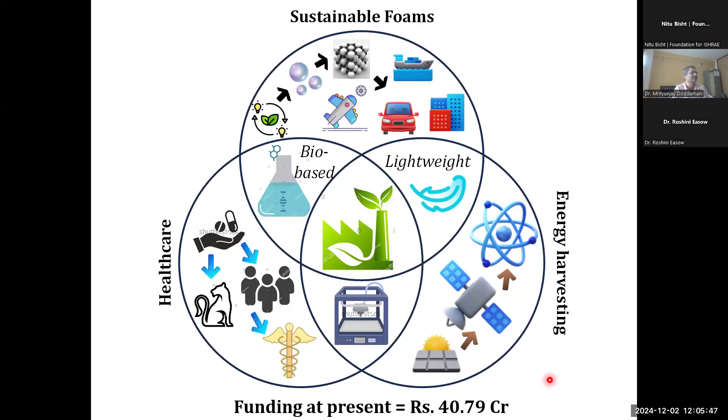And here pertaining to foams, this is where I got connected to ISHRAE, though I am not from thermal sciences. Presently my group is being funded for 40.79 crore from various funding agencies. So just before going into the ISHRAE project of foams, I want to just talk about foams a little bit. This is the area wherein I've been working for the last 10 years, and my PhD was also in the same area.

So we call it foams. Foams are basically two types: one is a closed cell foam, second is an open cell foam. This is a typical picture of a closed cell foam, wherein in any material we infuse hollow microballoons. And by infusing these hollow microballoons, we take advantage of that to the tune of even going for insulating foams. So here the benefit is we can have different size microballoons, different wall thickness, because these are hollow, thereby the wall thickness comes into picture.

So based on the different size, based on the different wall thickness, the property of a given foam, or a composite for that matter, changes. So we have an additional axis, and that is the wall thickness, and that's what has been shown here. We can have the same microballoon outside diameter, but inside diameter keeps on changing. And these different inside diameters give us the flexibility of developing or designing a material.

From underwater vehicles to marine, automobile, aerospace and space applications, this flexibility is given by micro balloons having the same outside diameter but varying inner diameters. But what would be the material of these micro balloons?

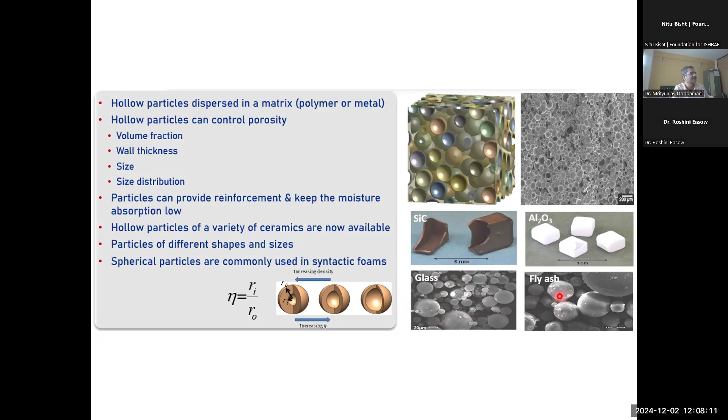But from the strength and property enhancement perspective, we always go for spherical ones, because there is no stress concentrator, and even when infused, there will be a uniform spread due to the spherical shape. This is how these microballoons give us wide flexibility.

Applications are numerous, starting with thermoforming plugs used to form different metal sheets, then underwater maintenance modules, where buoyancy is critical. By infusing these microballoons into any material, we cut down the density, giving us lightweight materials. The material into which we can infuse ranges from polymers to metals to ceramics.

Submarines also use this. In extracting crude oil far off from shore and bringing it to shore, we transmit it through pipes, and these pipes sink. That's why buoyancy modules have been developed, which float on seawater and prevent the pipe from sinking and rupturing in between. There are many other applications in railways and aerospace too.

There are some interesting applications like this too. I think all of us can easily make it out - this is a football. In sports, these foams are quite widely used.

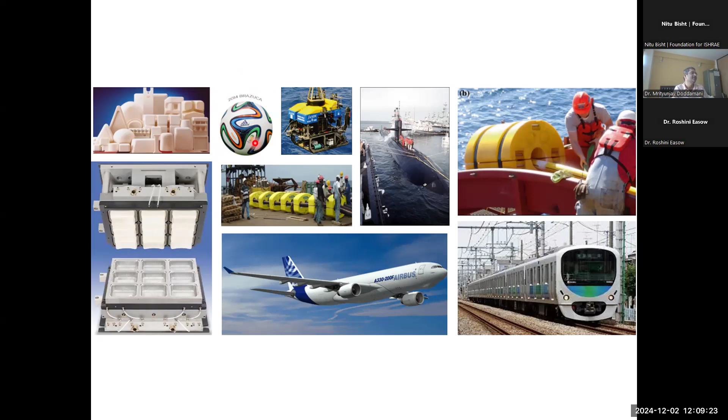Back in the 2014 World Cup football, we took a ball and cut it out, wanting to see what innovation Adidas had done. This is a plastic ball, not a leather ball. What we found is there are different layers - the outer layer is polyurethane.

Then comes the closed cell foam, a small layer where the micro balloons are infused. Then there's a large, thicker layer of open cell foam, where the porosities are interconnected. A Scotch-Brite in the kitchen is typically an open cell foam, and a sponge is an open cell foam too.

This has been engineered in the football for a well-known reason. Such a large sponge layer is required because when a player gives a header, there should be minimum injury to the head. That is why this large open cell foam is used.

There is also a small layer of closed cell foam just below the skin, so that it absorbs moisture and keeps it locally available, preventing it from seeping inside the bladder, which would gain weight and change the flight of the ball when kicked.

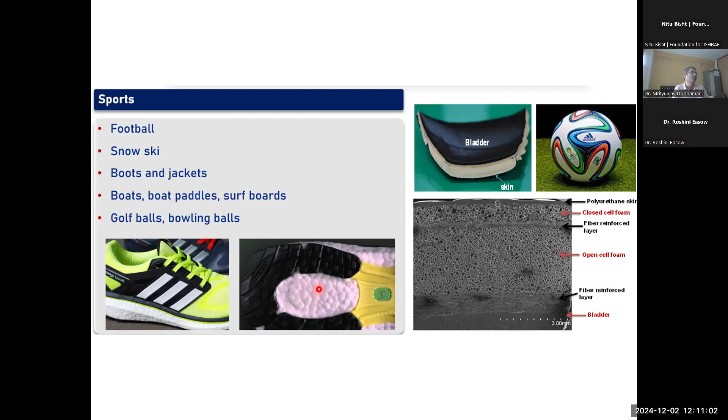There are many other applications too, like the soles of shoes, and that's why such shoes cost more - because we induce a combination of open cell and closed cell foam so that we can have minimum jerk to the knees.

This is how syntactic foams are extensively used, from buoyancy to marine to aerospace. And here comes my interest in syntactic foam - I approached ISHRAE back in 2019, and in 2020 I got that project on insulating foams.

When we talk about buoyancy and structural applications, we use different material systems and design different materials, and cost is not a major concern there. But whenever we go for large scale industrial applications, cost becomes a sensitive matter, and that is where we design a material and come up with different ideas to make it into a foam structure.

But there's such a wide spectrum of materials, no? Yeah, because the applications are numerous and their different properties would also be different. So it's a huge spectrum from which you have to choose.

Yes, you're absolutely right. So if I'm going for aerospace or space, I need to choose a different material system and look at how I can design or tailor a material. When we design a material system for a specified application, can it be a single material or a combination of materials? Based on strength, modulus, and whatever properties you require, different strategies come into picture.

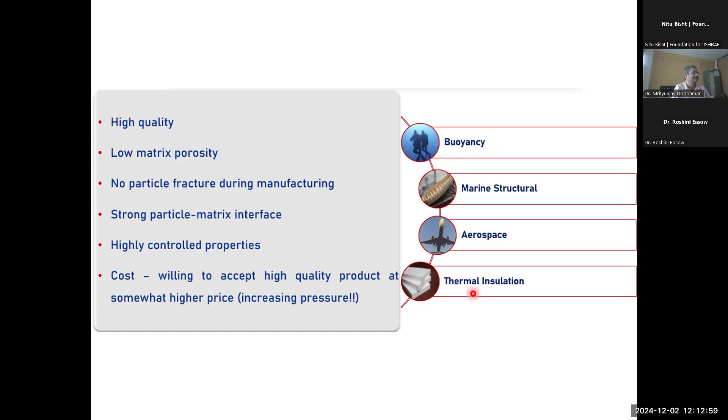So this is one simple slide I put in. If we talk about high density polyethylene, which is widely used nowadays as a thermoplastic, how does it matter if I use 1 kg of that virgin polymer or even recycled polymer? This is our research group's other aspect: can we make it more sustainable, cut down consumption of virgin or recycled polymers by infusing foaming materials like these tough shelled ones, or even infuse blowing agents in that case.

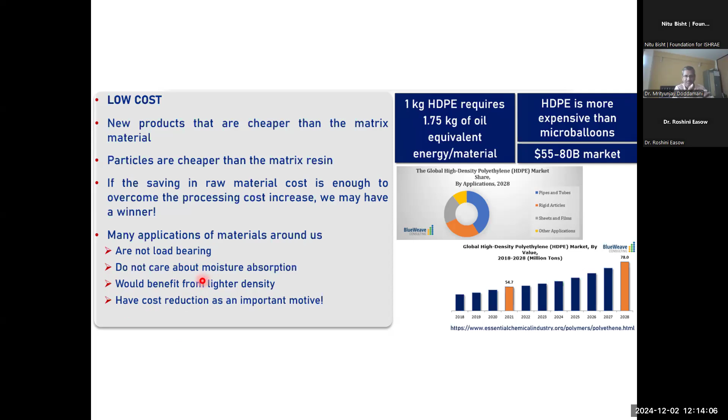So again, it has been very clearly understood, what is your objective? This was one such objective wherein we developed different materials for plumbing and electrical applications, where load bearing was not an issue, not a load bearing element, and moisture absorption was not much. That's how we developed a fly ash based system here for electrical applications. So that is what this slide shows, our group's research outcome.

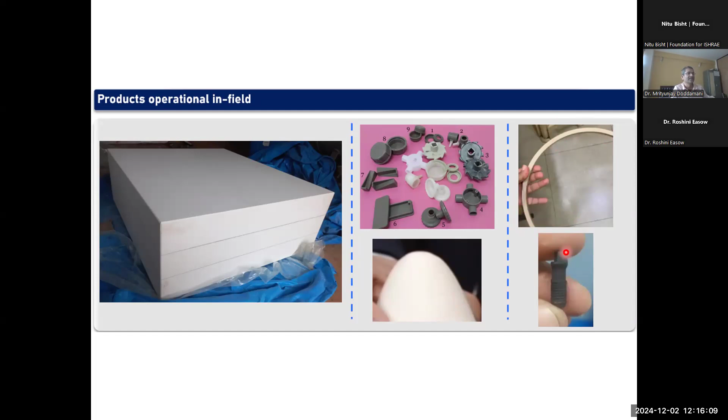And there are some gaskets here - oil and natural gas industries use different metal gaskets, we replace that with a polymer gasket with a specified foamed system. This is a screw for biomedical implants, again biodegradable, and so on and so forth.

This is another one wherein we filed a patent, and this will also be funded soon by DRDO. Anybody can immediately make out what this is - this is a hammer of a small weaponry system. When we talk about small weaponry systems, it's 9mm machine pistol to AK-47 to 51. So the requirement was, can we reduce the weight of small weaponry systems for a soldier in the Siachen glacier? So we reduced the weight by one-sixth.

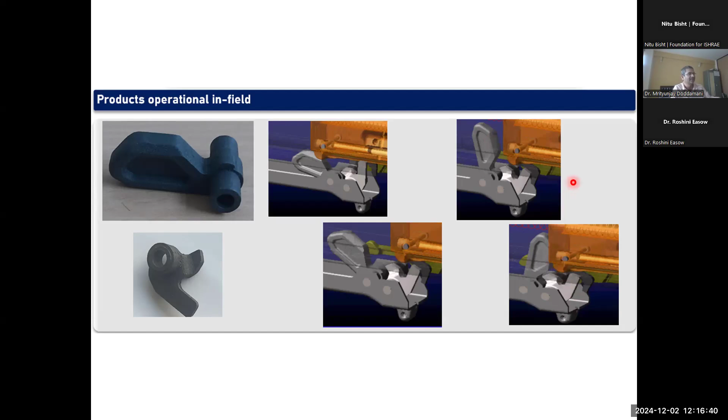So we replace the metal with the plastic, and again that's a foamed system. We did some innovation in 3D printing as well - as I said, my focus is on conventional and advanced manufacturing systems. In 3D printing, because it deposits layer by layer, Z strength is an issue, so we address that Z strength issue also by modifying the basic system.

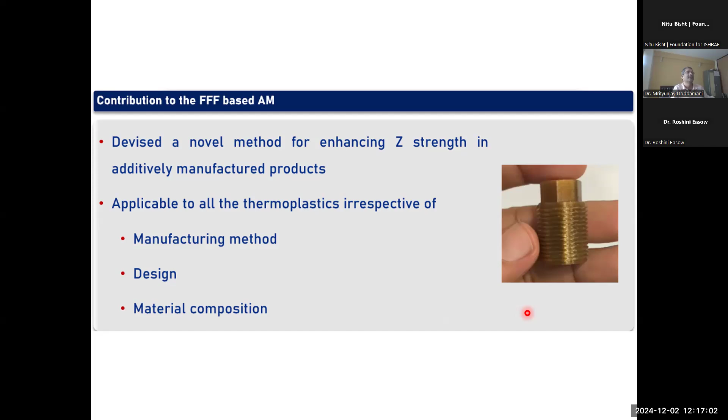I'm thankful to ISHRAE that they funded this project, though I am from a manufacturing background. I remember in Delhi there were around 30 projects being screened, and out of those 30, 29 were from thermal background. I was the only one from manufacturing, and only one project got funded.

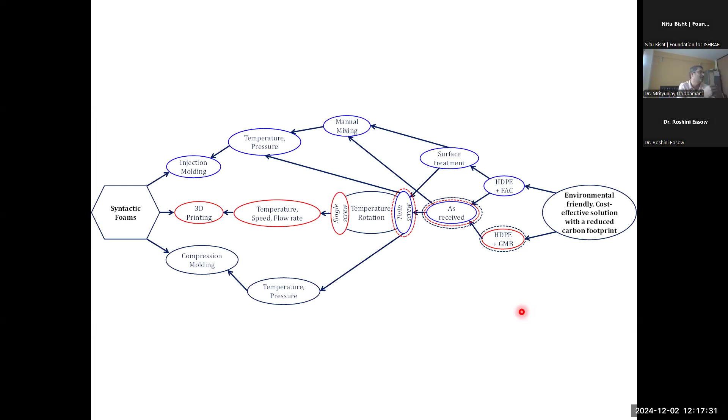So moving to the foams and the ISHRAE project. The title was Cost-Effective Enhanced Insulating Foam for Cold Storage Application. From ISHRAE, Yash was the point of contact. This was the typical timeline - it got approved in 2020 and completed in 2022, so it was a 2 year project.

COVID interfered a lot with this project. Yes, yes, very much true. So this was the timeline at that time.

The deliverable of this project was a new product with better insulating capabilities, upscaled process, and easier adaptability - to both conventional and advanced manufacturing systems. I kept that as one of the deliverables because, having domain expertise in conventional manufacturing and working in advanced manufacturing, I thought we should be able to develop a material that is easily adaptable to both these systems.

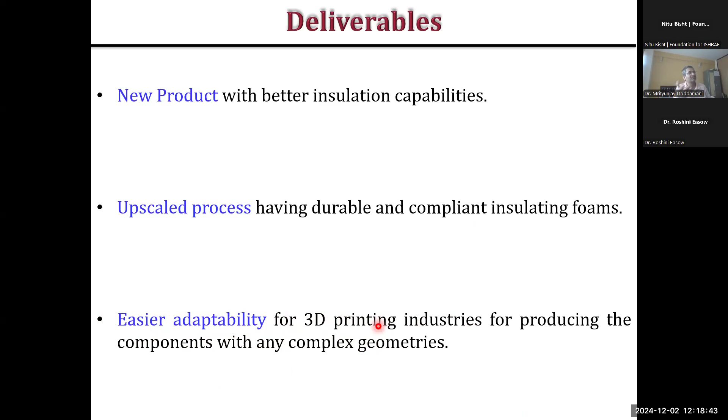This was the flow of investigation we executed. We started with CFD simulation, and the basic reason for the CFD simulation is to tap the effective thermal conductivity of a lightweight structure, which is what we did here in a simulation environment.

Then we did an analytical investigation, took the effective thermal conductivity and the volume of a Kelvin structure. What is that Kelvin structure? I'll come back to it a little later - we can make it out through this as of now.

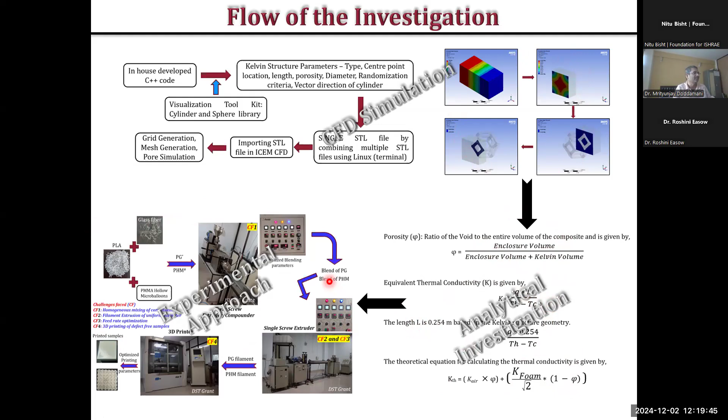We took the effective thermal conductivity from the simulation and then needed to find out the enclosure volume of this structure we designed, so that the thermal conductivity can be tuned. Then we did an analytical investigation, and after that we actually manufactured the component and showed the actual product outcome of this entire research flow.

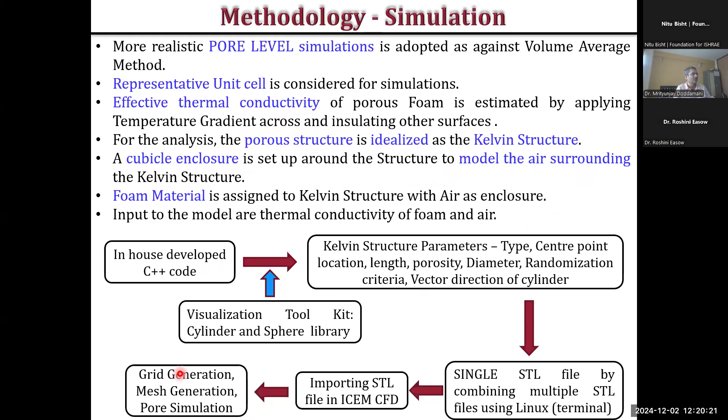For the CFD simulation, we did a pore level simulation. We took a unit cell and tried to find out the effective thermal conductivity. For the porous structure, we chose the Kelvin structure, which is best from a thermal conductivity perspective. We modeled that using a cubical enclosure, modeled the air surrounding it, followed the methodology, generated the grid mesh, and finally did the pore simulation.

This is how that Kelvin structure looks like - these are single unit cells of the Kelvin structure. We varied the porosity level also, because this porosity level plays a vital role in the heat taking a specific path on the struts and so on. So we varied from 70, 80, 90 percent.

We did the simulation and applied the boundary conditions using steady state thermal condition, with a hot plate and cold plate. We maintained 100 degrees C at one end and 25 degrees C at the other end, because we wanted to know what the heat flux through this Kelvin structure is.

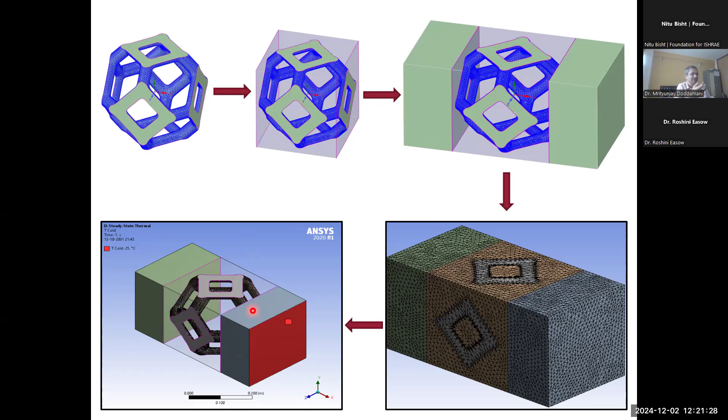This is how the Kelvin structure looks like - small struts forming a hollow space again. Why hollow space? I already mentioned it - being in the syntactic foam area, I know how we can make this hollow space beneficial for different applications. We did the simulation and got all these results, way back in 2021 I guess.

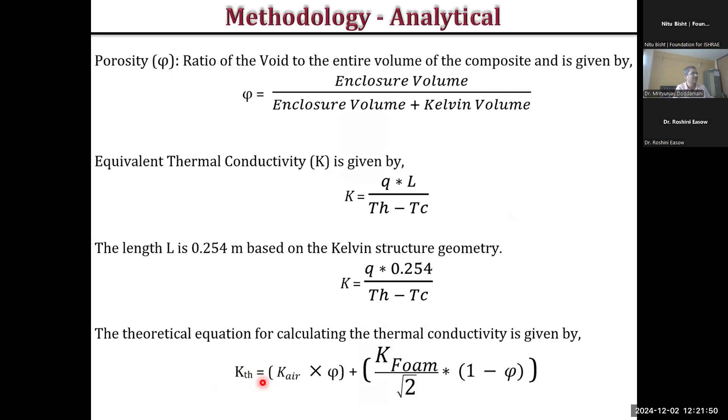From these simulations, we wanted to know the enclosure volume - specifically the Kelvin volume. Then, using available empirical equations, we found out the effective thermal conductivity. We compared the effective thermal conductivity through simulation and theoretical means - these are non-foamed ones, and this is a foamed one.

So when we say non-foamed, meaning all these struts are made up of a solid material system. And here, when we say foamed, the strut itself is a foamed one.

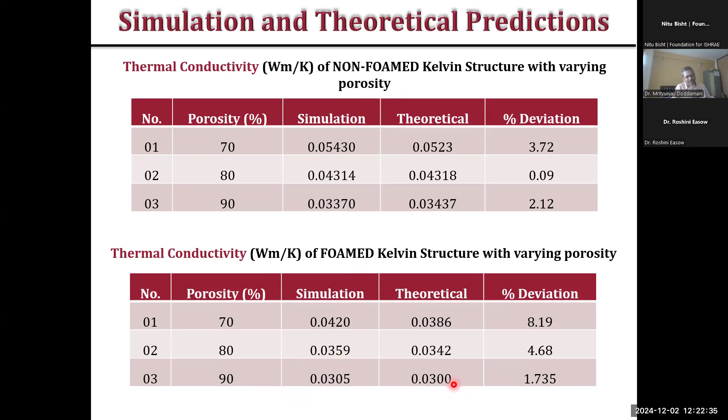Before going into the manufacturing side, we wanted to know what level we can reach with the porosity level increase. When we compare foamed and non-foamed, the theoretical values are somewhere around 0.03, which is what we estimated using our simulation and analytical background.

And then we used a 3D printer again, as Dr. Roshini rightly pointed out. This was work when I was at National Institute of Technology, Karnataka, Surathkal. This printer was readily available at my end at NITK, funded by a DST project. It has a build volume of 500mm by 500mm by 500mm, open source, so any material I can use, with a 3 years warranty.

In these 3 years, we never bought any ready-made material from the market. This process is known as FDM, or fused filament fabrication.

Input here is a filament, which is nothing but a wire. So polymer wire is fed, CAD drawing is fed, and then it prints layer wise. But when you have hollow spaces, what is there inside the hollow spaces?

Because you said foamed and non-foamed, I presume foamed means you have a foaming agent, right? When it's non-foamed, then you're forming it in your 3D printer. So what is the void containing?

Yes, the void... I'll come back to that, ma'am, when I show the pictures.

So here the filament is being fed, and all these filaments we never bought from the market. We brought the raw material, we extruded the filament, and that's how the ISHRAE project funded one equipment known as a twin screw extruder. Through that filament, we printed on these 3D printers.

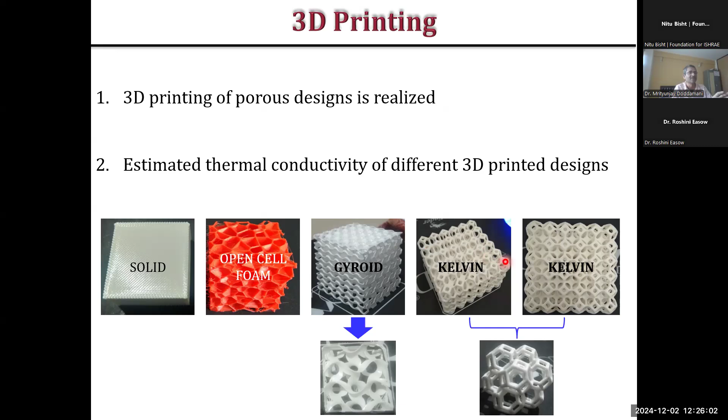Now, why am I saying 3D printing here - I believe you've understood, because in conventional manufacturing, producing such a Kelvin structure is, as of now, not possible. This is where advanced manufacturing comes in and helps us achieve such a high level of porosity. This system was funded by ISHRAE.

Conical type we go for when we induce metal powders in the polymers, because we need higher thrust and pressure. But here, as we were not intending to go for any metal powder system, we went ahead based on our domain expertise and said parallel screw is sufficient.

Most critical in all these manufacturing systems is what speed of screw you set, what temperature you set, to get an appropriate foaming element. This is where in experimental systems investigation it takes quite an amount of time, around 6 months, to optimize, to look around, revisit, and come back with that optimum structure.

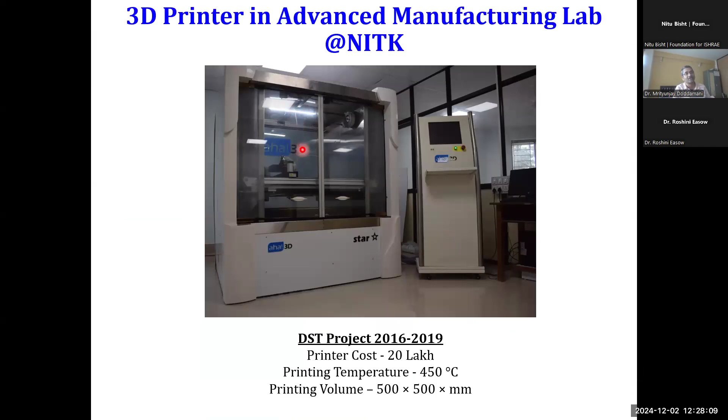Here we have a filament as the input, and only plus minus 50 microns variation is possible for a printer to feed it appropriately. So diameter management is very critical, and also the temperature at which we keep the wire. A lot of experimentation goes on here, and this is the complete picture of this project.

So we went ahead with polylactic acid with glass fiber, hollow micro balloons, and then also with SCO2. We mix this and we get filament. This is a twin screw extruder.

But in this twin screw extruder, these are all machines that have specific limitations. Twin screw extruder doesn't give a uniform diameter filament, so we need to use a single screw extruder before feeding it to a printer.

This was again my other DST grant within which both the equipments were there. So with this funding from ISHRAE, we blended it and then fed it to a single screw extruder. Now the wire of a definite diameter is possible, and we consistently fed that, and finally we came up with the Kelvin structure.

In this entire process, we optimize the parameters - the mixing parameters, the extrusion parameters, and the 3D printing parameters. So when you talk about 3D printing, it's the flow rate, the temperature, the feed, and the temperature of chamber and temperature of nozzle through which you are feeding the filament.

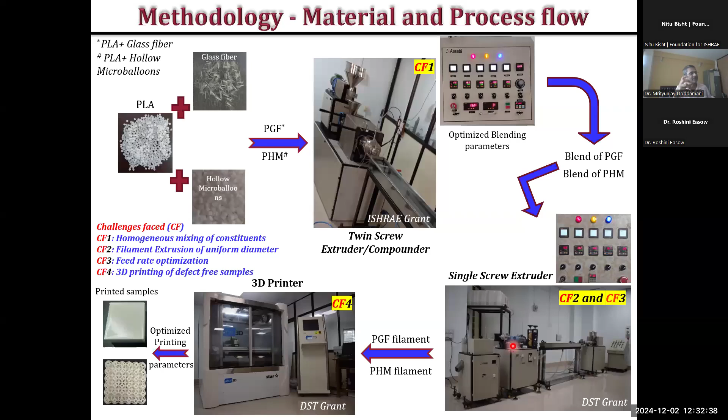These are all readily available. The only thing is how we tune up the material properties, and this is what we look for.

Once we design a material, we manufacture it and take a micro CT. A scanning electron microscopy is another instrument readily available, but I get better and more intricate details in micro CT. This is the same micro CT which doctors use for advanced investigations when there's a bone fracture, and so on.

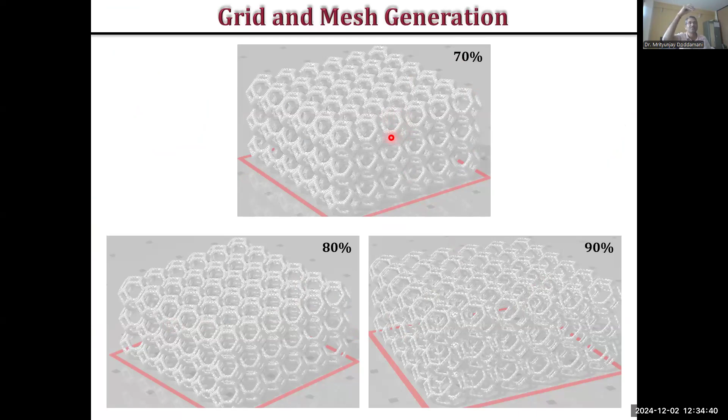I think I have already shown this. Here the struts are made up of that material with that much additive, but with a different porosity level. With this, we were able to reach 0.0311 experimentally. We were very close with our CFD simulation and analytical investigations.

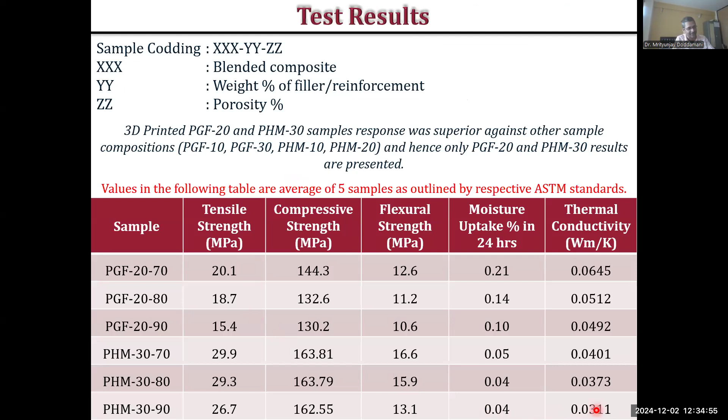We went ahead with this just as an example, because ultimately the product should come out at the end after doing all this. So this was the product we printed on a 3D printer. First, there is no joint here because 3D printing gives the advantage of an integrated component. This is a vessel which was completely printed, and this was the cap which has been completely printed, made up of the material system having thermal conductivity of 0.0311.

Then I mentioned the other parameters because this is probably the parameter industry looks at very closely: what is the cost of doing all this? Printing time is 3 hours for this vessel, the reason being the printing speed was a maximum of around 20 millimeters per second. Nowadays it has increased substantially, because this was the printer I procured in 2016; nowadays printers have higher printing speeds.

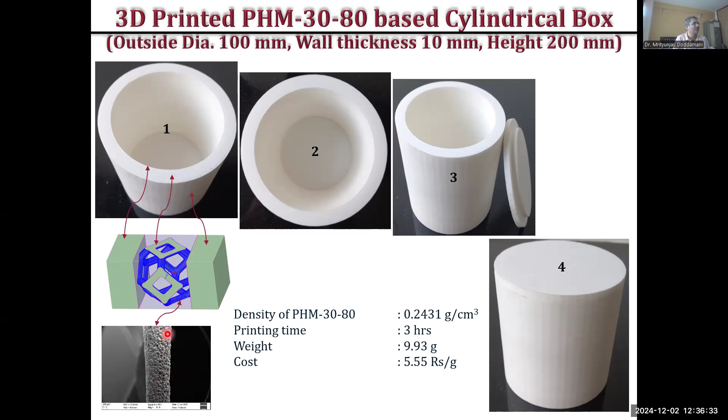We can increase that. I've just shown a simple vessel here, but you can have any complex, intricate shape produced because we just need to feed a CAD drawing to a printer. But if I want to go for injection molding, based on a small change we need to produce an entire new mold cavity. So that doesn't come into the picture—tooling cost is zero in 3D printing. And this is the structure available inside with the foamed parameter, and that's how it gives us 0.0311.

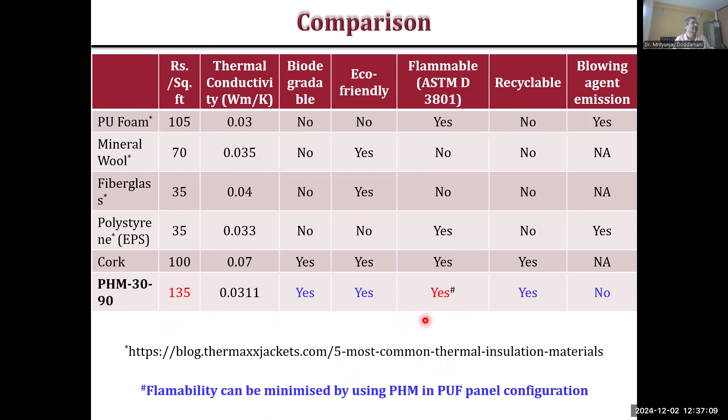Now this is another slide which all of us want to compare and benchmark, so we compared that. The cost comes out to 135 as against the best one, PU foam, at 105. It is flammable, yes, but if we use it with a PUF panel, that can also be arrested—just like PU foam can also be used in PUF panels. So that's how the final comparison sheet looks.

This is the salient feature of this proposed material, the research outcome funded by ISHRAE: the material is biodegradable, has a lower environmental footprint, and enables cost-effective manufacturing of porous foams—the same pellets can be put into injection molding and get that as well. There's much lower material consumption because now we have a Kelvin structure. No doubt the Kelvin structure is not possible in an injection molding machine, but because of it we are saving a lot of material all around.

Easier scalability—any 3D printer can print nowadays, whichever are available in the commercial space. Geometrically complex structures, different shapes and sizes, and zero tooling cost. You just change a CAD drawing, feed it to a printer, and your next product is on the shelf. It can be easily bonded; any available industrial bonding agents can be used.

It's just like a PU foam, the way we use it.

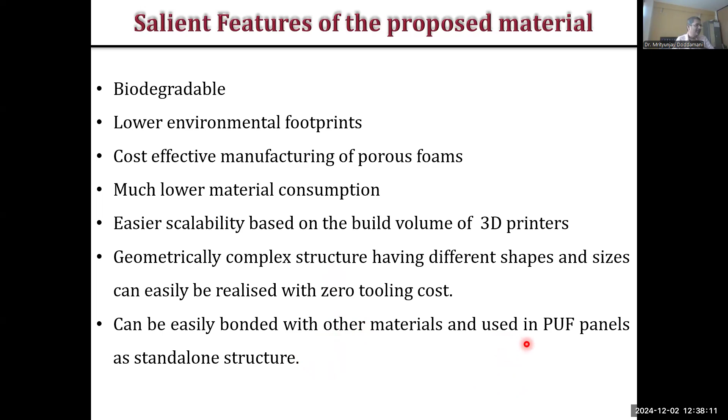But what about recyclability? Suppose you have this material—can it be brought back into filament form and reused? Yes, I can crush this and again extrude the filament. We did a study with many such materials and found that even after processing it 3 times, the properties are not degrading much. We crush it, extrude, print it, and use it again—such 3 cycles. The strength drops by around 8% after the 3rd cycle, but everything else still survives well.

In one study, we compared our 3-cycle reprocessed material, which we again manufactured, with virgin injection molded ones. Compared to the virgin injection molded ones, our 3-times reused material gave a much better performance in 3D printing.

Okay, that's good. So there are 2 questions in the question and answer. I don't know, can you read? Are you seeing it? Just a minute. It should go to chat. It says not in the chat, in the question. Okay, I'll read it out.